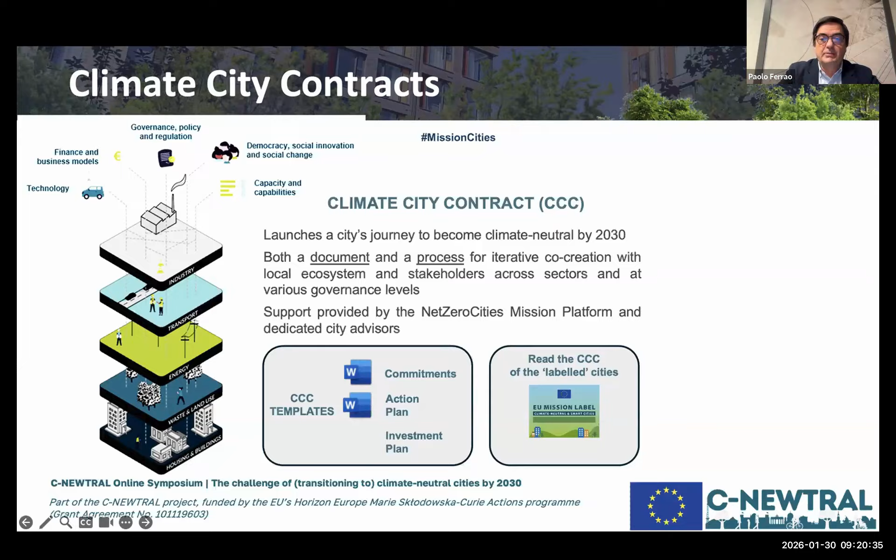I would certainly like to invite you to download some of these CCCs from different cities so that you can really appreciate the type of development that is done in these CCCs. I just brought here data from these CCCs, which is not from all of them, but from some of the CCCs.

Basically what I tried to do was to say, look, in the different cities, which is the range of emissions? And you see the range is extraordinary. So you have cities that overall announce emissions of about 1 ton of CO2 per capita to about 8 tons of CO2 per capita. So we need to be very mindful that when we speak about cities, they are very diverse.

So one solution will not fit all, and the cities are very different. Even, for example, if you look at which are the main sources of emissions, well, industrial processes - it depends if it's an industrial city or not. And then you see here in blue, most of the cities will be in this area, so from 0 to 1 ton of CO2 per capita. Transport, for sure, from 1 to 2 tons of CO2 per capita. Buildings vary a lot, particularly because of climate, but it's one of the major emissions.

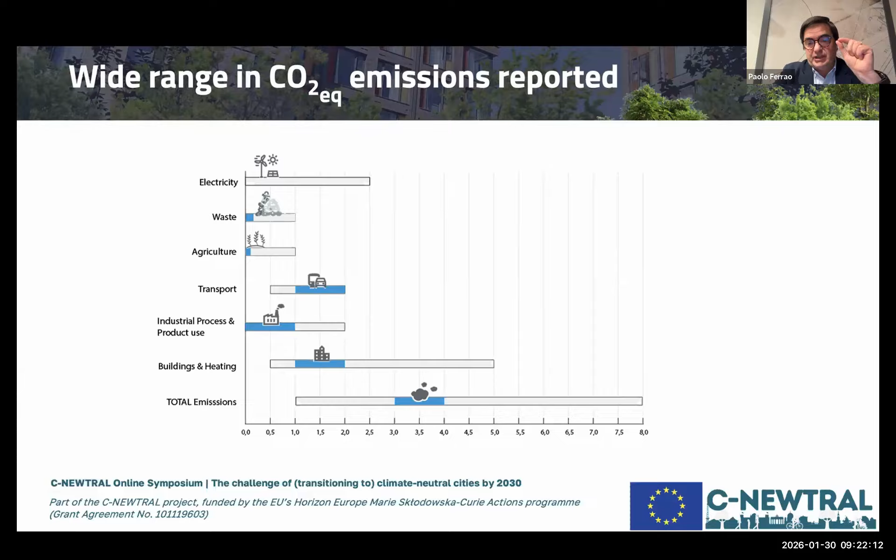And then you have waste and some electricity production, which would be, in fact, otherwise reflected in, for example, buildings and so on - so there are very few that refer to electricity. Indeed, the areas that you have just mentioned as focus of your concern at C-NEWTRAL, they are very much, of course, aligned with these ideas.

Now, why is the mission challenging? I think it is very challenging because of this slide. When we say a city, what is a city? The city is all of us. So normally in the investment plan to have the city becoming climate neutral, what you see is that the municipality normally will have 5 or 6% of the investment.

You are speaking about municipal infrastructures, transportation, waste collection, but 30 to 50%, it's the citizens - it's all of us. So are we, for example, improving our building, changing our windows, electrifying our car? And then others, like industries, from 40 to 90%. So this is the big question.

And in your research studies, it will be very important if you see how this can be done. This requires new business models for which the citizen sees benefit in his engagement. And certainly I'm very excited with your work, and I think you could certainly deliver in this area. This is of enormous importance because this represents more than half of the investments that need to be done in a city.

Now, in the mission, in the CCCs of the cities, they present their actions in 5 domains: one is certainly the decarbonization of the energy sector, the other is the decarbonization of the transport and mobility sector, decarbonization of the building stock, moving from a linear to a circular economy model, and then compensation for residual emissions. That's where the cities are presenting their actions in the CCCs.

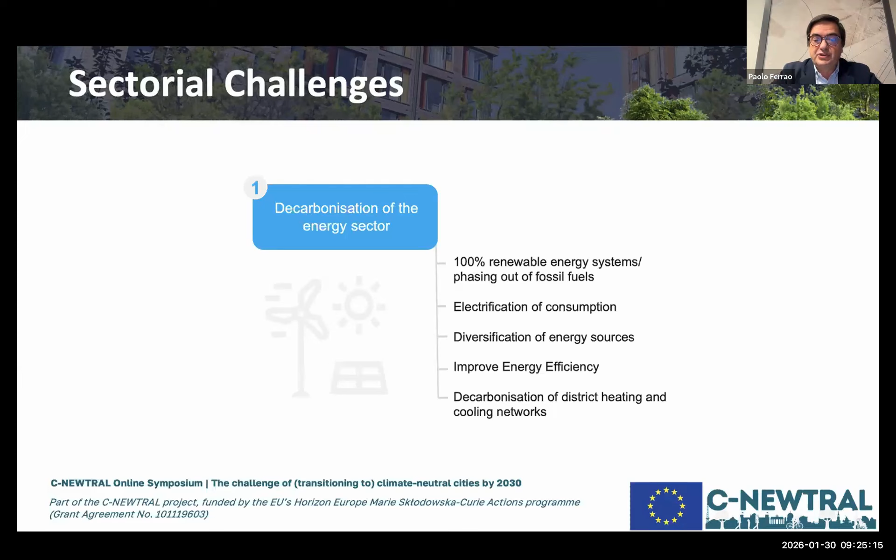So again, the coordination between the local level and the national level. And then at the city level, certainly the electrification of consumption, diversification of energy sources, to improve energy efficiency—here city planners and officials have something to do—and eventually decarbonizing district heating and cooling networks. These are some of the projects cities are proposing.

If we look into the transport and mobility sector, a central piece is to reduce private individual transport, use public transport, active mobility, shared use of private individual means of transportation, electrification of transport and the use of sustainable fuels, and emission-free urban logistics. These are some projects cities are presenting here. If we look at the building stock, we need a massive building renovation and refurbishment.

Just to give you two numbers, it is normally accepted that today the rate of refurbishment of buildings that need to be refurbished is 1% per year—meaning 1% of buildings are being refurbished every year. Some calculations show that to reach the objective of climate-neutral cities, we need to improve this from 1 to 3%. So we need to triple the effort of renovating our buildings, and this is huge.

It's huge in terms of jobs, huge in terms of skills, but of course it creates a lot of opportunities. Because there is another critical thing: people need to see the benefit of this. They need to see that it creates jobs, that it's good for their health, and increasingly we need to look at these issues not just as climate change—because people are less aware, less concerned about that alone—but there are a lot of co-benefits, and we should be able to articulate this.

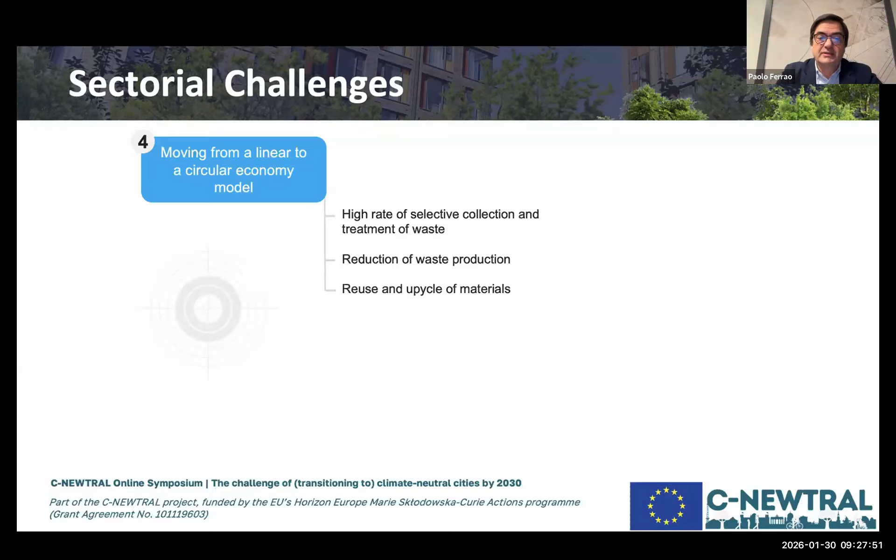So if we speak about the circular economy, we need to improve the treatment of waste, reduce waste production, and reuse and upcycle materials. And the cities are proposing some projects in these areas.

And then, of course, we will not come to zero emissions. So some emissions that are still residual at the end need to be offset. We need to develop and consolidate the infrastructure, and we need solutions for carbon capture—for example, having electricity produced from municipal waste and then capturing the CO2 that is released. That's what we call negative emissions. So this is also possible.

Now, which are the main barriers? Well, financing, for sure—that is a main barrier. And as I mentioned before, the multi-level governance: we need to articulate different levels of government, because only at the local level we cannot solve everything.

Of course, the municipal sphere of influence, the power to act, is very limited. As I said before, most of the actions need to be done by the citizen, by all of us, and that's why I was so interested in your focus on citizen engagement. This is extremely important, and as I'm sure you know, maybe the most difficult thing. So you are really in a very challenging topic.

Of course, there might be cultural barriers, and I'm not going to go through all of these, only the ones I've highlighted. You need capacitation, education, and awareness—that's very important. You need a skilled labor force. For example, when we speak about building rehabilitation, there is a great opportunity to promote the industrialization of building rehabilitation, because we don't have enough labor to triple the effort in rehabilitation of buildings if we don't accompany that with industrialization of the process. This is a great opportunity for local industries, for innovation, and really to create new jobs.

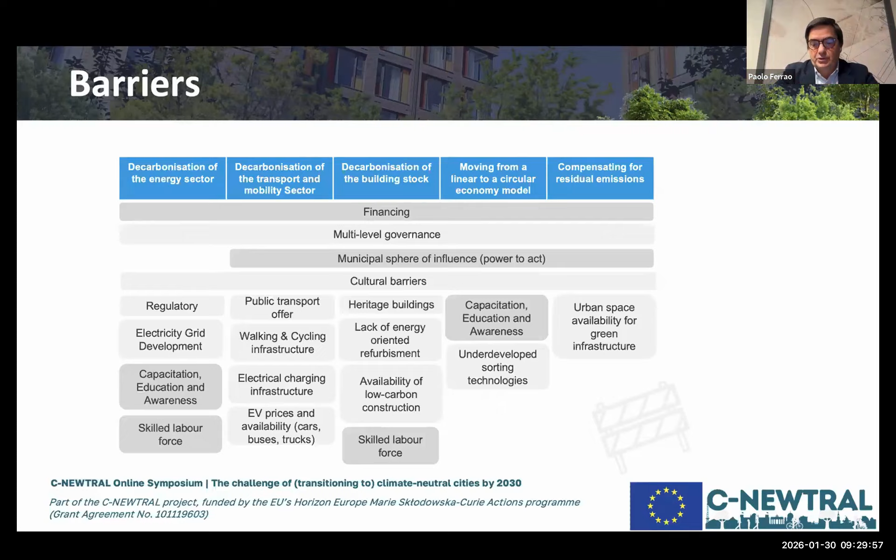Well, opportunities are at the same order of magnitude. We need innovative policy instruments, local green jobs, smart and flexible electricity grids. There is a lot of room for demand side management of electricity, battery storage, and then what I think is very important—that's what, for example, I'm doing here today at MIT—is to work on digital twins.

It is very important because if we have a concern on multidisciplinarity, if we have a concern on renewable energies, the big difference is that models need to have spatial and time resolution. So we need to have much higher degree of granularity.

Just to tell you, the last thing about the mission in Brussels: it is supported by Net Zero Cities. They have created this big effort with significant human capacity that delivers support to the cities. Recently they developed a new capacity under Net Zero Cities, which is the Capital Hub, a group of experts that provide support to the cities on financing.

The Capital Hub serves as a central coordinating point in this fragmented landscape of project preparation, national platforms, technical assistance providers, and public and private financing. So it is now one of the main priorities.

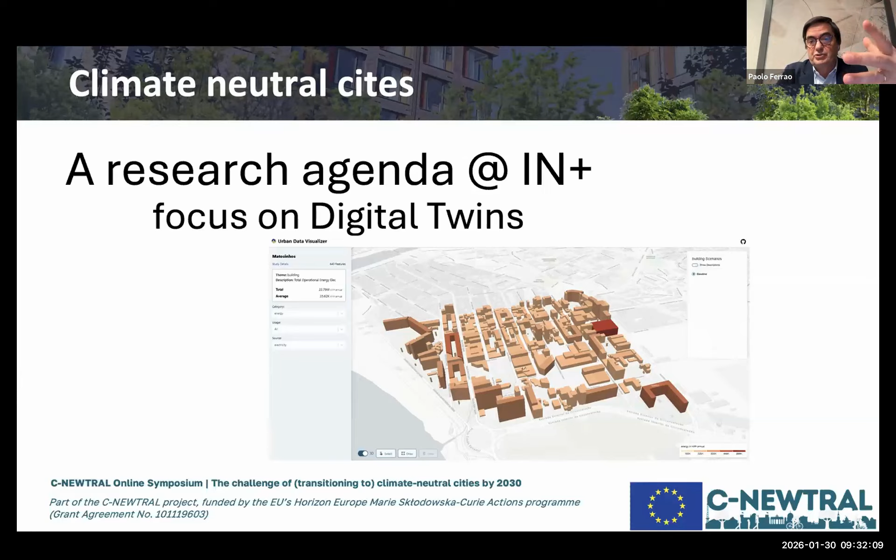Now, as we are speaking also to PhD students and to academia, I will dress my dress of professor, not as a mission board chair. I will advocate for the need to have digital twins. The digital twins are basically a representation of the city with spatial resolution and time resolution, focused on different elements.

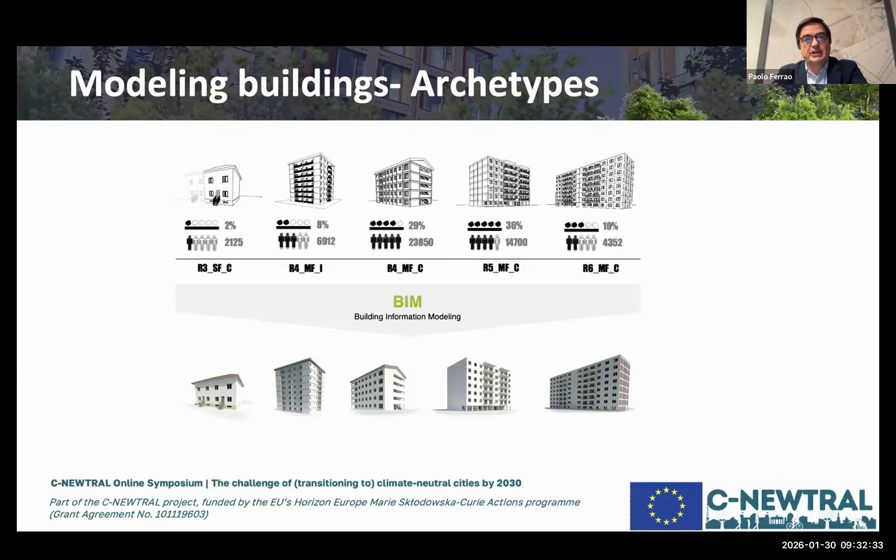For example, what we are doing is looking at the city and seeing what type of buildings are there. Normally buildings fall into what we call archetypes - there are buildings typical of the 40s, then 50s, 60s, 70s, 80s, whatever. We characterize the different buildings, their construction materials, and then the computer reconstructs the whole city. That's where I've been working with MIT for the last 15 years.

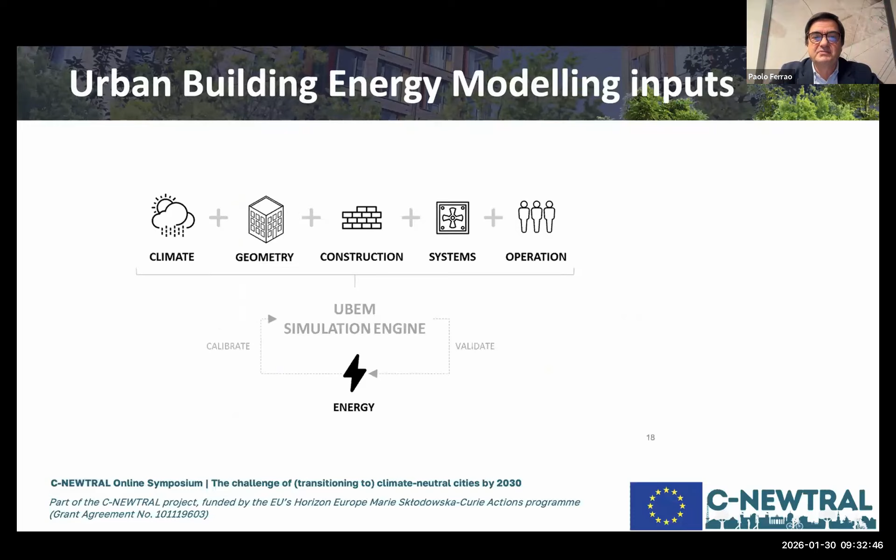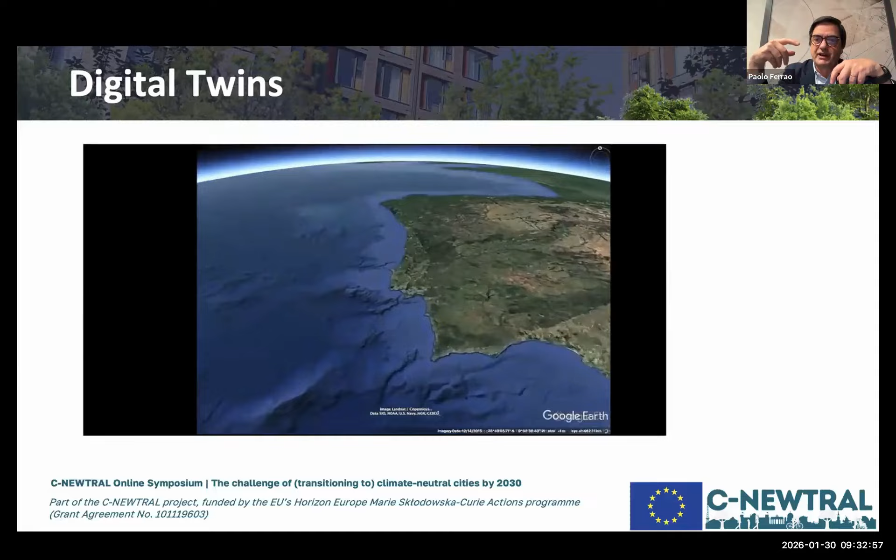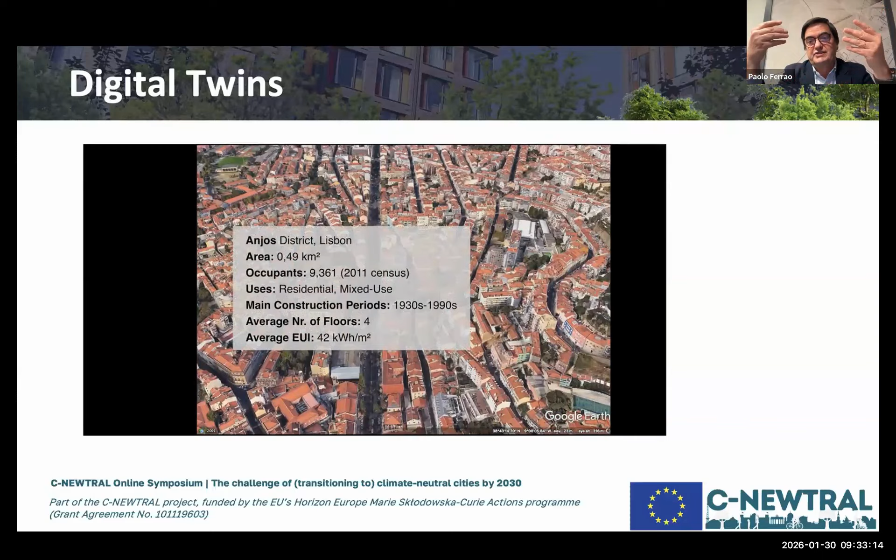I will show you an example of a Lisbon neighborhood. This is what we may call 2.5 dimensions. We take the real buildings and draw them as boxes with exactly the same size as the buildings. What's very important to calculate energy needs is that they have the same wall-to-window ratio as the real building. I'm not very concerned if the window is exactly that window, but I'm very concerned if it's 20% of the building or so, because that's where the sun goes in.

These models also take care of the shades from one building on another, and they can calculate the energy needs for heating and cooling, every hour of the day, because we know the climate and how the sun will move across all the days.

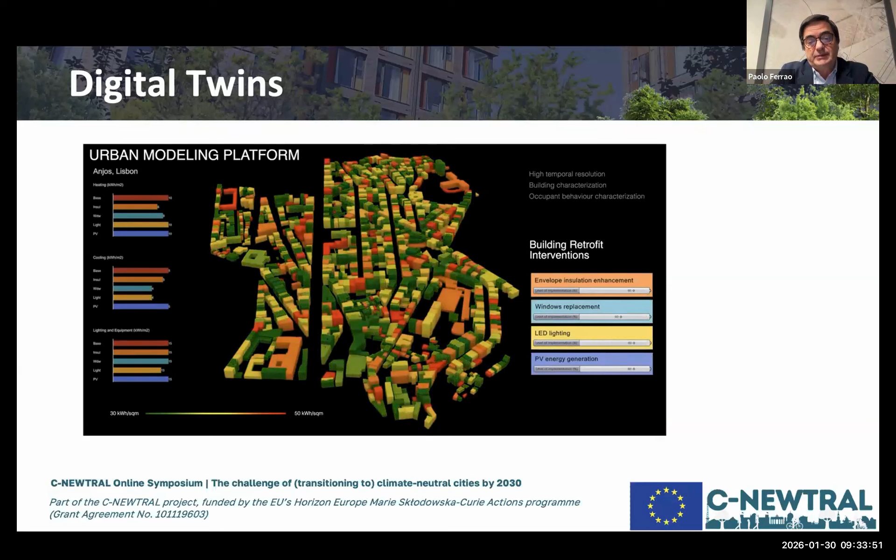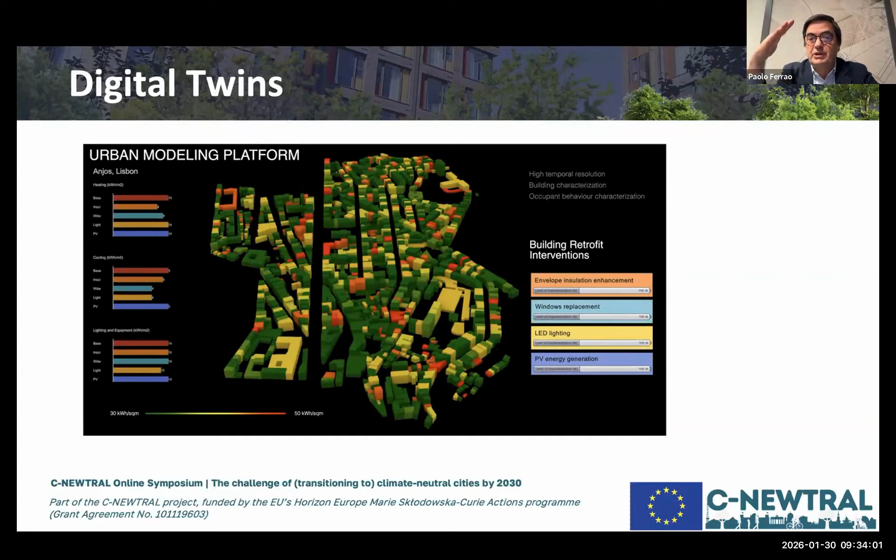This is very important because we can do the energy modeling in this sense, and we can see how much we benefit, for example, if we insulate the walls, if we change the windows, if we change to LED, and also if we install PV. This is the basis for our digital twins. So they are very much building centered.

But as I will briefly show you, we are also looking at mobility, and I will show you some examples. So what are we doing with this?

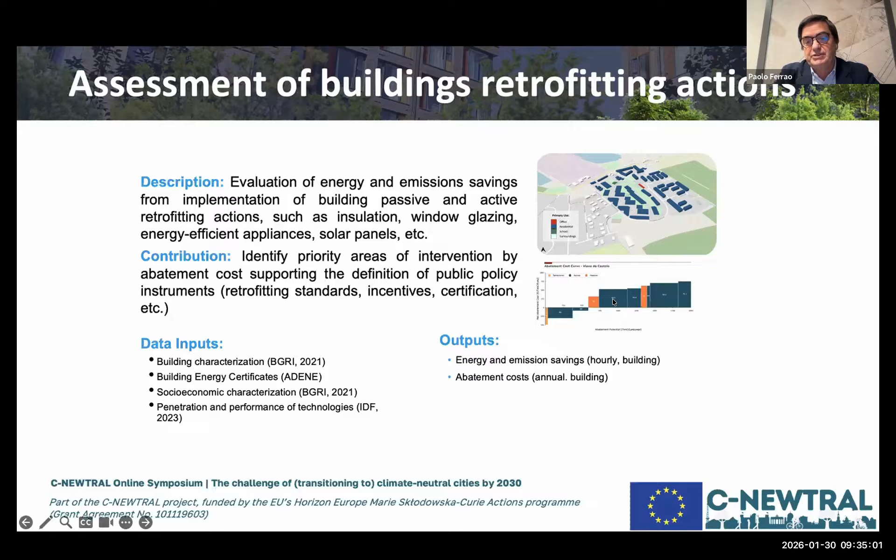We look at, for example, a representation of the abatement cost curve. What we do is define a set of measures - change the lights, insulate the building, change the windows - and then calculate for each measure how much it costs and how much CO2 it saves. This provides a prioritization. Here this is cost, and there are measures that save money, and those should be the first ones. Then there are measures where you need to pay a little bit, but the area of each representation represents the amount of CO2 annually saved.

We are also looking at building retrofit in another way, which is trying to make a building recyclable and reusable by design. This is something we are very much focused on. I've been working a lot in the past, for example, with the auto industry. As you may know, you cannot sell a car in any European country if you don't demonstrate that the car could be recycled to 85% or 95%, including energy recovery.

But for a building, which is the major producer of residues, construction and demolition, you don't have any requirement. And this is very strange. So that's something that needs to be changed.

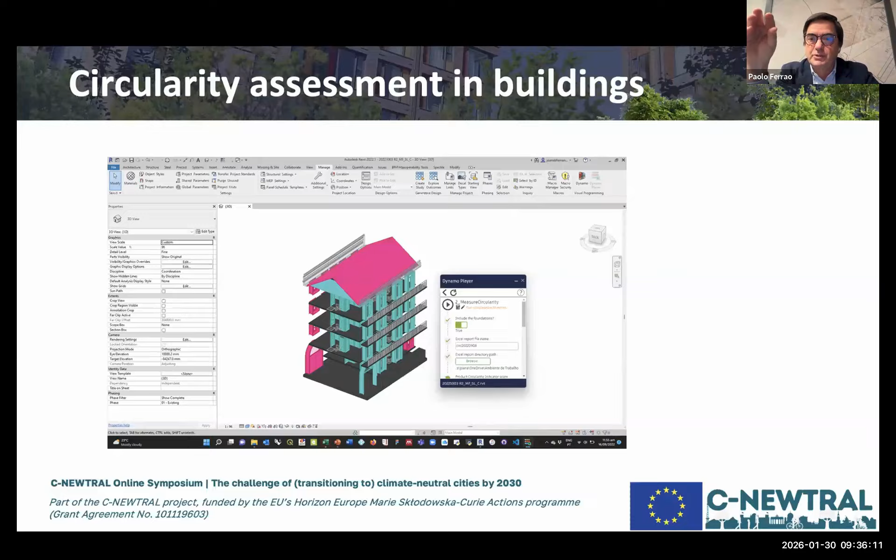Here what we are doing is considering how the building's elements are connected together, how easily they can be disconnected. So we automatically calculate, when a building is designed in BIM, how much is the recycling potential, how much is the reusable potential, and how much material you can take out of that. This is really a tool for circularity assessment in buildings by design.

Another example, which we call the mobility poverty index. Here what we do is we have the location of each building, and we've defined an indicator which basically measures how far each door of each building is from a metro station, a train station, a bike station, a bus stop.

And then we have socioeconomic data to see, for example, how can people that live in the building afford to have an electric car or so on. We make an indicator that takes this into account. For example, this is Lisbon, and you can clearly see that in these areas it's excellent, but not far away it's very poor.

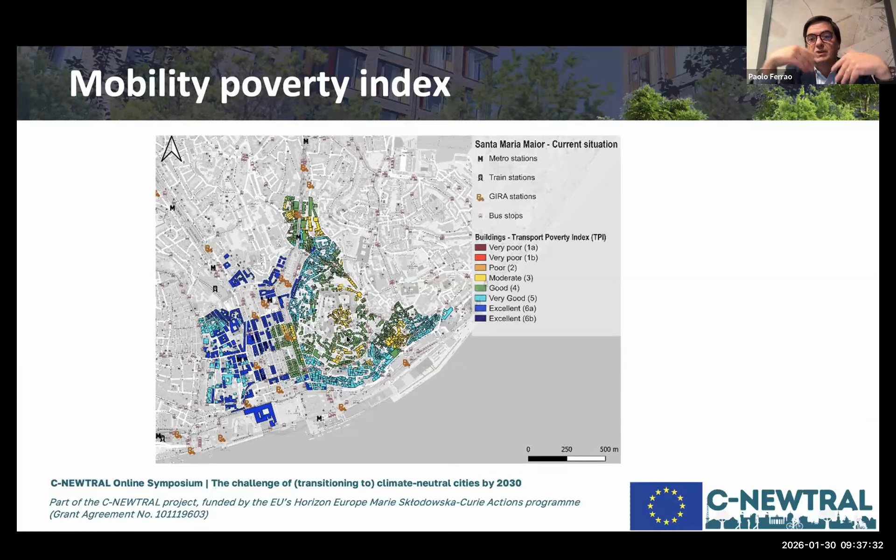This is the type of tool where, if you have your models geo-referenced and combine different layers of data from transportation infrastructure, socioeconomic and demographic data, you can really produce innovative solutions to support the design of better solutions for people.

Of course, if you have in each building the hour-by-hour potential consumption of energy, you can design what is now very interesting: energy communities, and for example the impact of demand side flexibility. If you switch on and off your equipment, how much can this impact things.

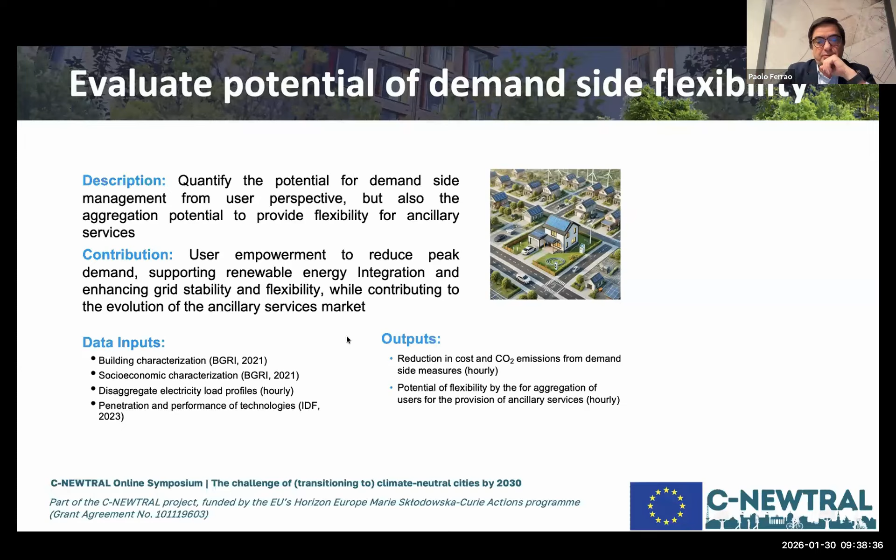This is something much discussed here at MIT because in the US they have a very old electricity network, so they are very concerned with the increase of electricity consumption. In Europe I think we are a little better. But anyway, with electrification this puts a lot of stress on the grid, so we should have this type of tool to see, at a local level, the impact of electrification and stress on the grid, and to evaluate the potential for energy communities.

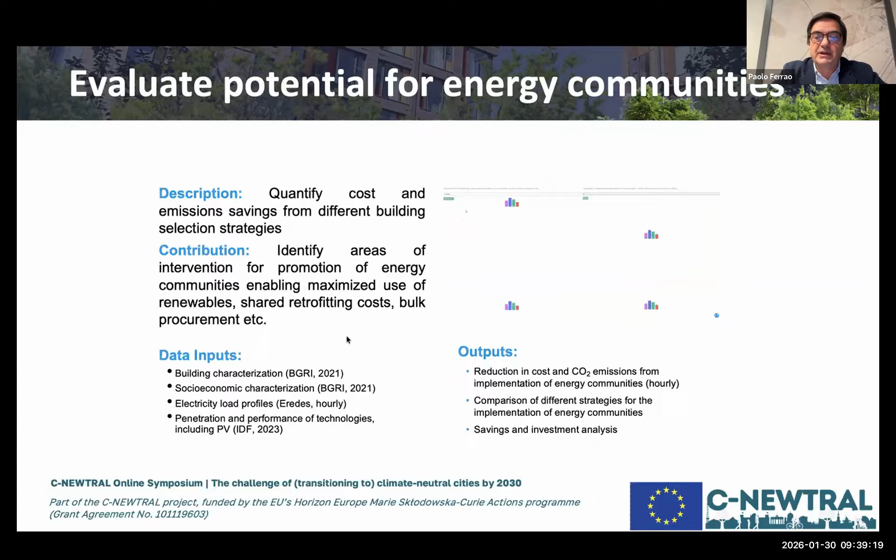So if we have buildings with different patterns of consumption of electricity during the hours of the day—for example a school, a house, residential—and then you have some space for putting solar PVs, how can the match between hours of production and consumption be better equilibrated, in order to minimize the need for batteries? I'll talk a little about this.

Well, this is my last slide. I really believe you have got this right. I was very impressed by this, so I couldn't be absent of this, even being here at MIT.

It's not only that it's 4 a.m., but I need to tell you that the outside temperature should be minus 16 or something like that. It's terrible weather. I got a cold already.

But of course, the aim of your doctoral network—which I went to study—being to advance new approaches for integrated planning of climate neutral cities through citizen engagement, as Aura just mentioned, and city governance decision-making support, could not be better aligned and better contribute to this big purpose of having Europe leading by example and trying to design climate neutral cities.